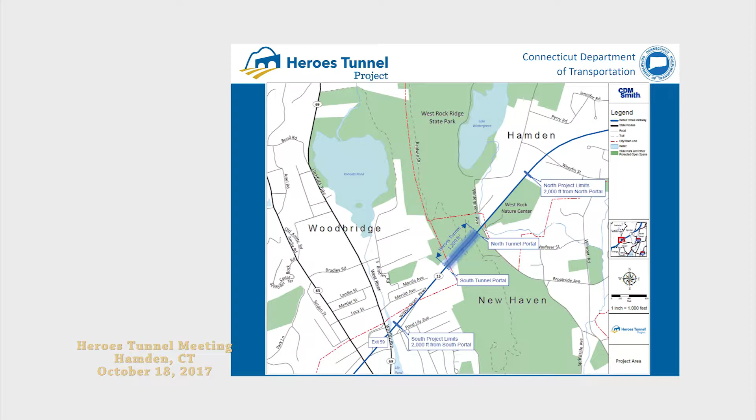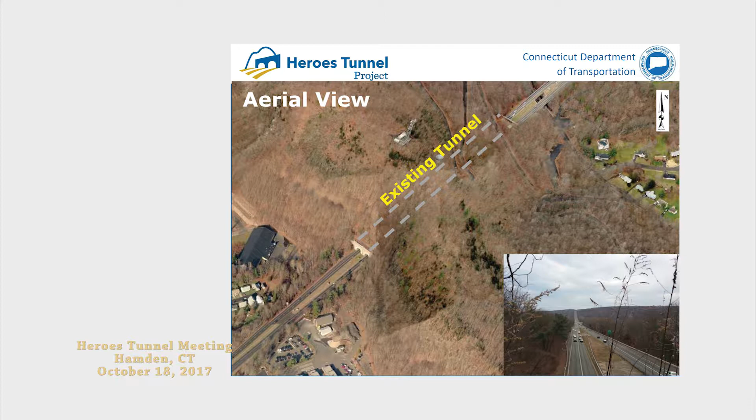So why are we here? What's the purpose and need? The purpose is to correct existing deficiencies of the tunnel, to enhance safety, to improve travel, and to ease maintenance. The need is to address the existing structural, mechanical, and electrical deficiencies, improve the geometry and safety, and reduce the need for maintenance, improve reliability, and extend the service life. So that's why we're here.

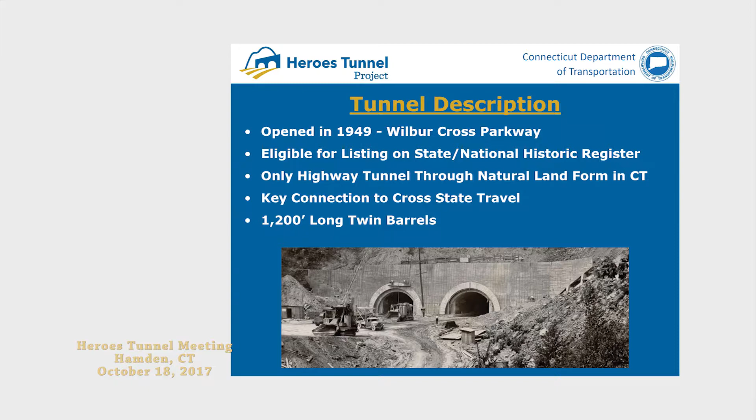The existing conditions: presently the tunnel is non-compliant for current tunnel standards and requirements concerning its geometrics, its ventilation and emergency systems. On its geometrics, each barrel has 11-foot lanes, 6-inch shoulders, really almost non-existent shoulders, and 26-inch raised walkways, as you can see.

For this type of roadway classification, the standards call for 12-foot lanes with an 8-foot left shoulder and a 10-foot right shoulder. So you can see the deficiencies associated with the existing tunnel as far as its width. That is causing issues as far as emergency response constraint. Again, there is no shoulder, so if there's any accidents in the tunnel, you really can't get around that. Also, that limited width is causing issues as far as peak hour congestion and causing recurring bottlenecks at those hours.

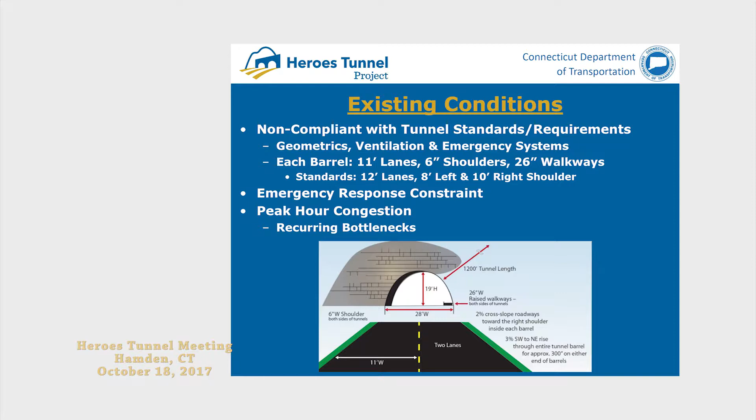The existing condition of the tunnel itself is presently in poor condition, as determined in the Connecticut Department of Transportation's inspection reports that the DOT is doing on a yearly basis. That was also determined in CDM Smith's 2009 inspection and study that looked at the existing conditions and potential repair options to address those conditions. Now, though it is in poor condition, it's not presently a serious safety issue, because it is inspected on a yearly basis, and the department makes sure any issues they find are addressed to make sure it's not a safety issue.

Now, what's causing this poor condition? For the most part, it's the groundwater infiltration that's coming from the ridge. Groundwater that's actually in the ridge is getting behind the existing tunnel liner, the concrete liner that's forming the walls and the ceiling. That water getting in there and behind there is infiltrating through the concrete. In some situations it has actually caused some of the lime in the concrete to leach out, causing stalactites that you'd see in a cave. Also, the freeze-thaw conditions are causing some of the spalling during the wintertime of the concrete, and contributing to some icicles that are forming from the ceiling and from some of the walls because of the water leaching through.

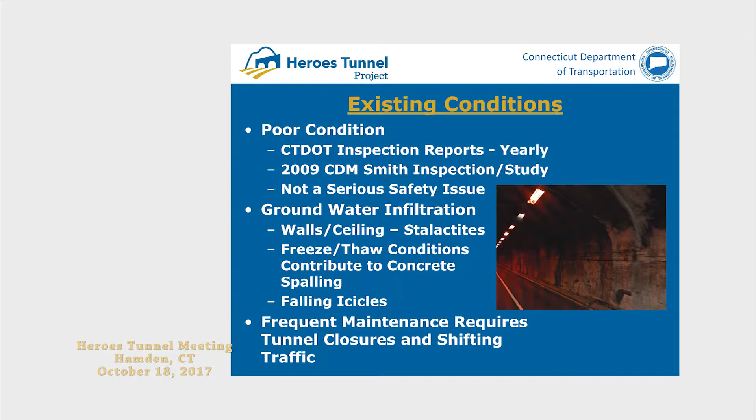Now let's take a look at a closer look at some of the issues. It's not very clear here — we do have some other pictures of existing conditions on our boards over there — but what you can see is evidence of some of the leakage here. You're seeing some of the efflorescence in the walls, some spalls, evidence of map cracking, and I think you also see in this photo some exposed rebar. All of this is signs of the deterioration in that concrete liner.

Again, what we're also seeing is the fact that the deterioration is somewhat linear. It's actually getting worse each year, but it is something that is addressed by the department as they see some of these areas. Eventually they try to go out, remove some of that concrete, and patch some of those spalls, but it's continuing to get worse on a yearly basis.

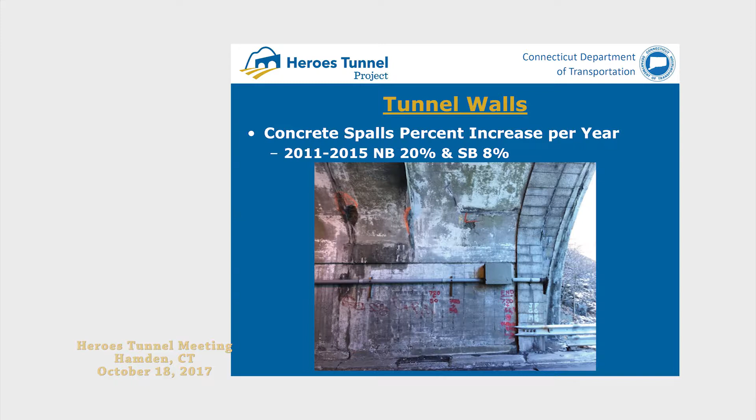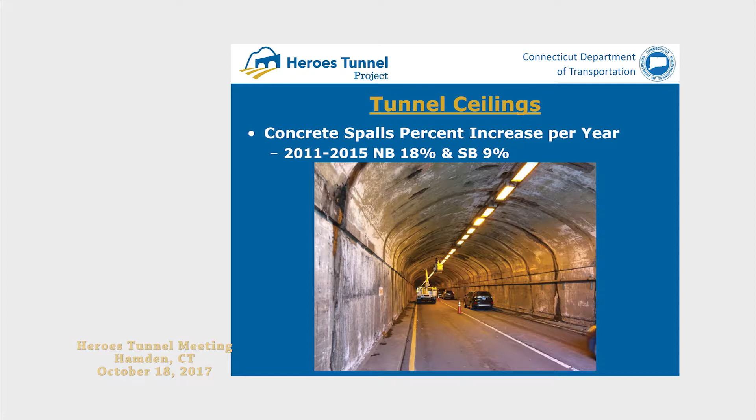But what's happening is, as water gets trapped back here, it's causing issues with the concrete liner of the ceiling and the walls.

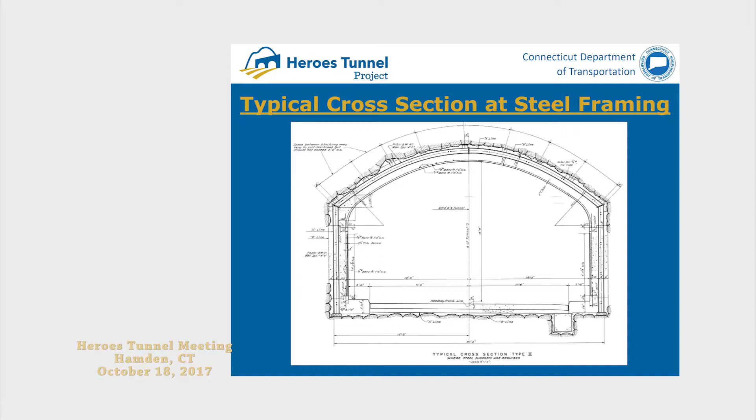Now this is the steel framing, a shot from the original construction. This is the steel framing they used to support the roof of the tunnel and also the walls of the tunnel. Eventually, after the tunnel was completely bored out, this gets filled with reinforced concrete liner that forms the concrete lining of the tunnel. The steel supported it and also strengthens that liner.

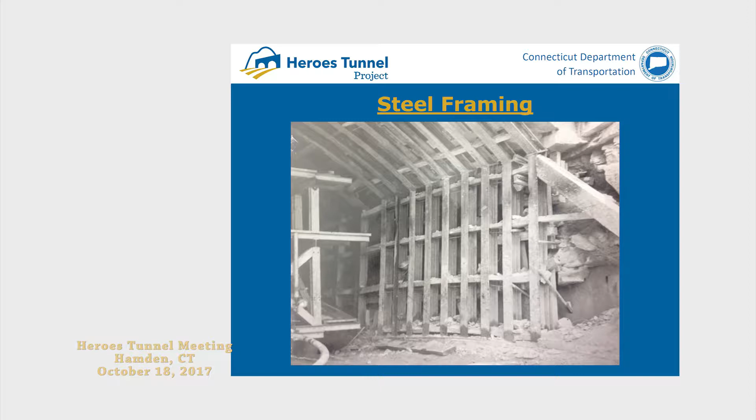As Dave said, CDM Smith did an original inspection in 2009, where we did a study looking at different repair options. We followed that up in 2014 with an alternative construction options study, and a supplement to that was done in 2016. That identified the needs and deficiencies of the existing tunnel and also looked at reconstruction and rehabilitation alternatives to address those needs. Each alternative was evaluated for several criteria, including construction methods, construction duration, construction schedule or staging, cost, traffic impacts, construction complexity, and anticipated useful life.

Now what we've shown is a graphic representation, which we also have on a board back here, of some of the reconstruction options we looked at in these studies. We also color-coded it: orange is rehabilitation, if you're rehabilitating a portion; yellow is new construction; green is temporary; and blue is abandoned.

So what we're looking at for most of these reconstruction options is the construction of a new bypass tunnel, either on a permanent basis or a temporary basis, and then either rehabilitating the existing tunnels or reconstructing them. Again, the idea behind the new tunnel is that you can divert traffic into it while you're working, and then once you're finished, you divert traffic into that tunnel and start working on one of the existing tunnels.

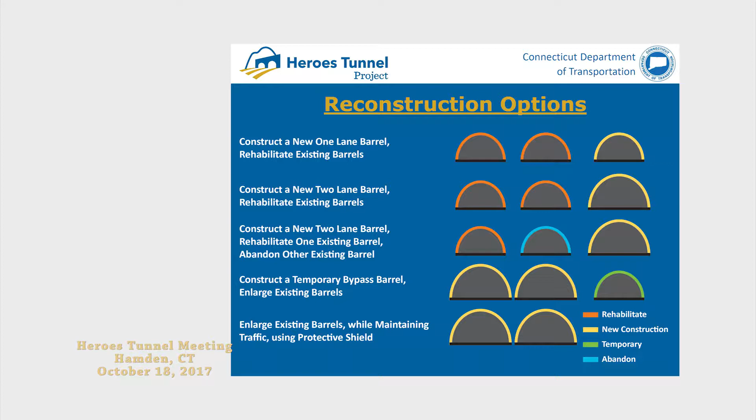Now this gives an idea of what the cross-section of the new tunnel would look like. This is for a 2-lane tunnel. You have the two 12-foot lanes, the 8-foot right shoulder, the 10-foot left shoulder. What we see here is the new concrete liner, a much wider tunnel.

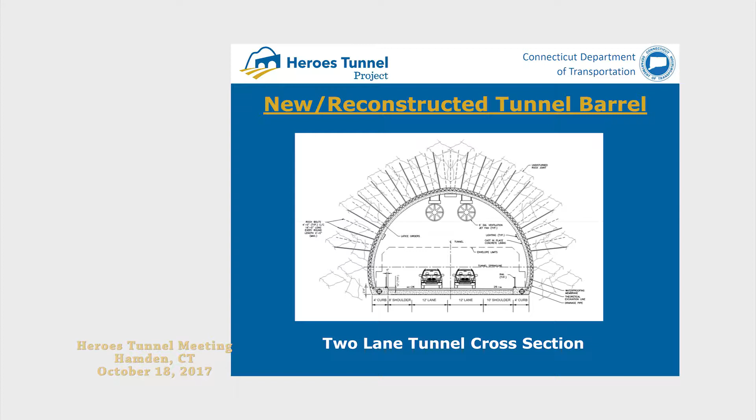What we're showing here is a lattice girder, a new type of construction for tunnels, and also the rock bolts. You'd be looking at strengthening the rock adjacent to the tunnel using the rock bolts, and also the emergency ventilation—jet fans, a possible ventilation system for the emergency ventilation.

For the rehabilitation options, we looked at two options. One involved shutting down one barrel completely and diverting traffic so that one barrel accommodates both northbound and southbound traffic. The other option would do this during off-peak hours only, putting traffic back during non-off-peak hours, though that would lengthen the construction duration, which was an issue.

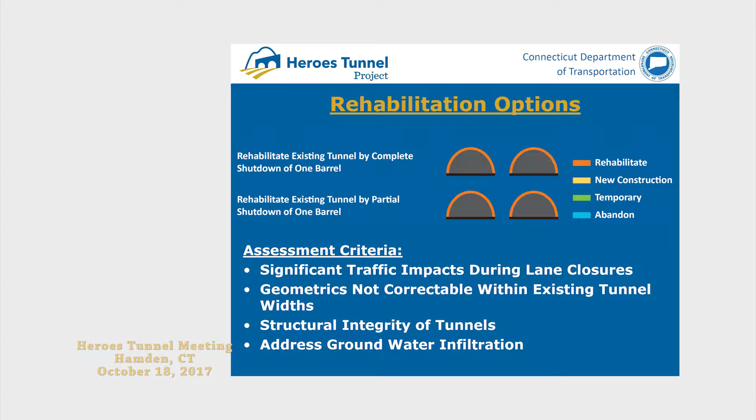What we found was very significant traffic impacts during those lane closures. Also, the geometric issues we discussed can't be addressed when you're simply rehabilitating the existing structure. In fact, some of these options even make the width more constrained. But the structural integrity of the tunnels can be addressed with these options, and we found ways to address the groundwater infiltration.

This is a cross-section of what our rehabilitated tunnel barrel would look like, showing the existing concrete liner we talked about previously. What we would do is drill into the rock with essentially a drainage hole, then patch the existing concrete liner and place a waterproof membrane between that and the new concrete liner. That would divert water so it's not impacting the new liner, and the new liner could be designed to take part or all of the loads associated with the tunnel. But as you can see, this was the two-foot six-inch safety walk you had there previously.

Now you're making this thing even narrower, further impacting the narrowness of the tunnel and its width.

And with that, I'm going to pass it on to Rebecca so she can talk about the environmental documentation.

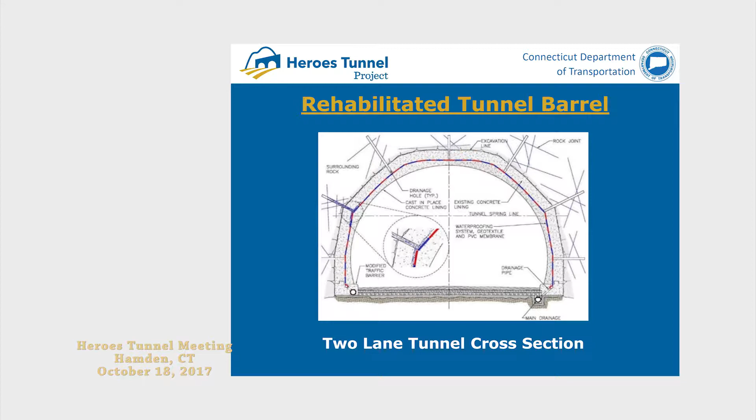Thanks, Mike. The National Environmental Policy Act and the Connecticut Environmental Policy Act are the formal policies we're required to follow. It's a very strict procedure to select a preferred alternative for the tunnel. The first step is to establish the purpose and need statement, which is where we are now, right at the beginning. After that, we go through alternative analysis, evaluating potential alternatives for environmental impacts as well as mitigation. Throughout that process, there's public outreach, which is what we're doing here tonight. At the end of the NEPA and CEPA process, there is a preferred alternative.

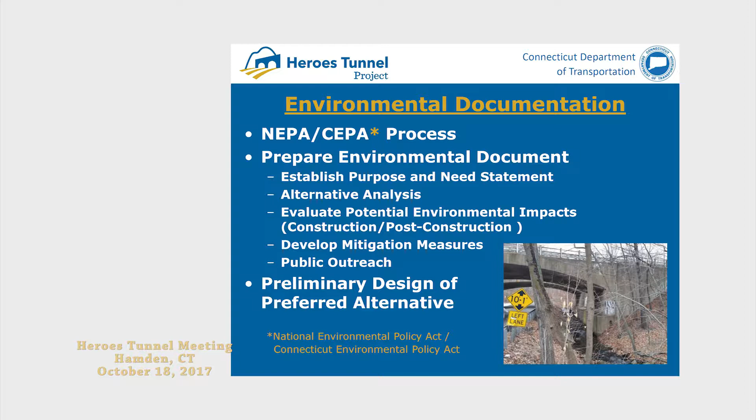As part of the NEPA and CEPA process, we prepare the environmental assessment and the environmental impact evaluation. So we're establishing the purpose and need that Dave read earlier, conducting field studies on endangered species, historical resources, and an overall survey of conditions, evaluating the alternatives Mike just went over, and considering construction and post-construction impacts and what mitigation will be required.

As part of this, we're looking at sensitive resources, consulting with state agencies, environmental partners, property owners, special interest groups, and the public. We're looking at air and water quality, groundwater, wetlands, historic and cultural resources, recreational resources, natural communities, threatened and endangered species, aesthetics, traffic, and noise.

Already identified in the area is Wintergreen Brook, West River, the West Rock Nature Center, and West Rock Ridge State Park.

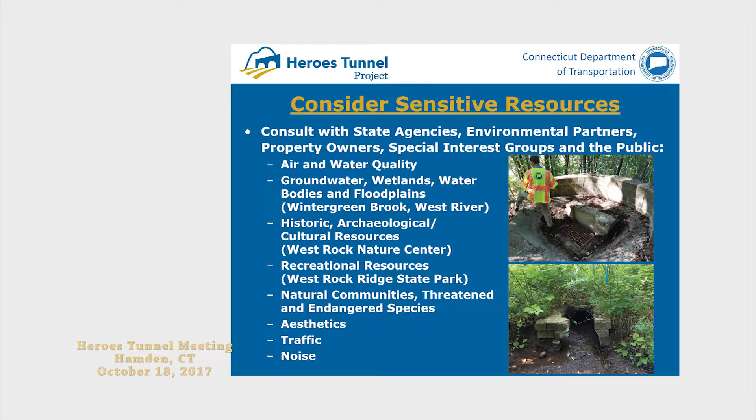This is a preliminary map of some of the sensitive environmental resources. You can see Wintergreen Brook here, and the floodplain that surrounds it. You can also see part of West Rock Ridge State Park, identified by the Connecticut DEEP as a unique habitat.

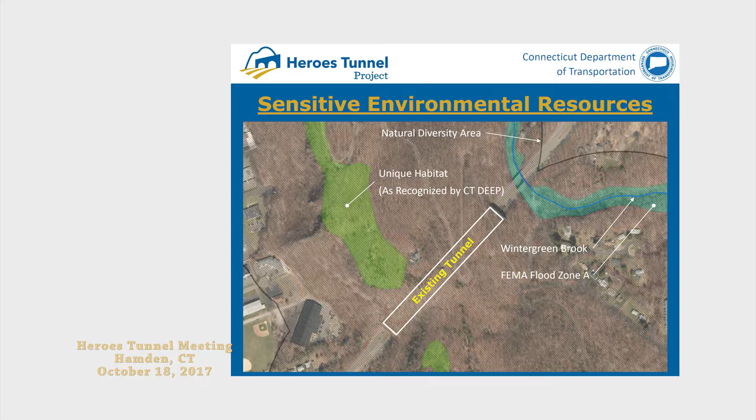On to public involvement. As part of public involvement, we will identify and engage key stakeholders to get their opinion on specific instances.

We have established a project website. I don't know if anybody's had a chance to see it yet, but it went live on Friday. It's heroestunnelproject.com, and I encourage you to check it out. There's information on the project, information on the history of the tunnel, and a comment and subscribe section where you can register your email and provide comments. Registering keeps you informed of other events and meetings, and provides you with our e-blasts, so you'll get any newsletters and updates.

And then the meeting process of the public involvement. Right now we have a formal public information meeting. However, there will also be outreach events such as pop-ups where we come to you, whether it's your senior center for a meeting or a farmer's market locally. We come to you and it's more informal, so you can ask us questions. It's not a formal presentation. We'll be having focus groups and then more formal public information meetings.